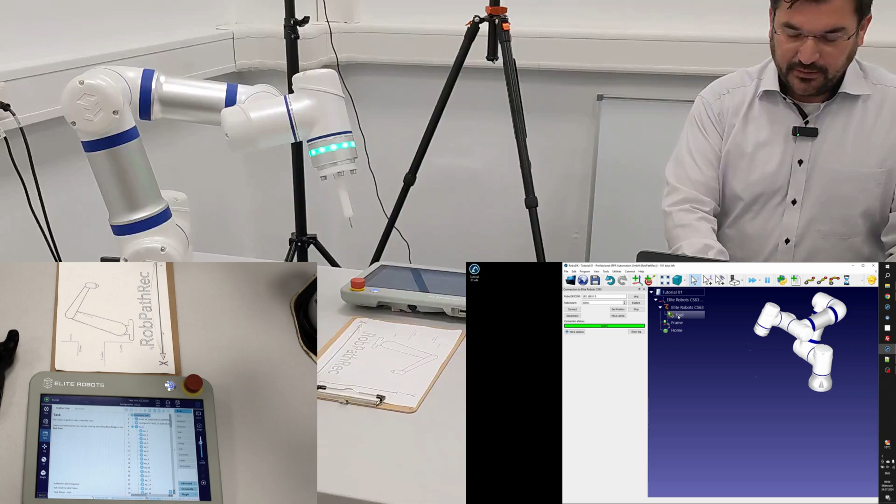Okay, so let's start with the first recording. We prepared everything, so we have a RoboDK station with a valid robot, a defined, calibrated, measured tool and frame. We have the home position.

I just start the VR application, Steam VR, and switch on the tracker. You can see from the status LED that the connection is built up, and you can check this on the screen as well. Okay, that seems to be fine right now.

If some of the components are missing, if you don't have any RoboDK file open, if you're missing one of the must-have components, robot, tool, frame, or the VR connection is not built up or active, then you'll get a failure message during the starting procedure of the Easy Automator app. But right now we have everything right, so we will just start the application.

And once it's open, I just hit start recording. So everything's fine. The pen, we will use the pen as a manual tool. Seems to be everything fine. Tool and frame, it's okay.

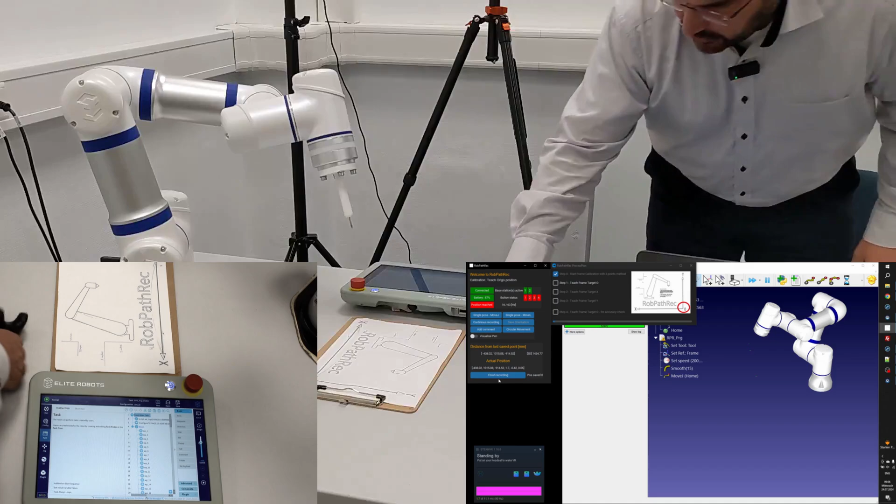And then start recording. So I just have to follow the instructions on the screen. That means just hitting 0, X, Y. As you can see, I already have the robot on the screen moving and following my hand.

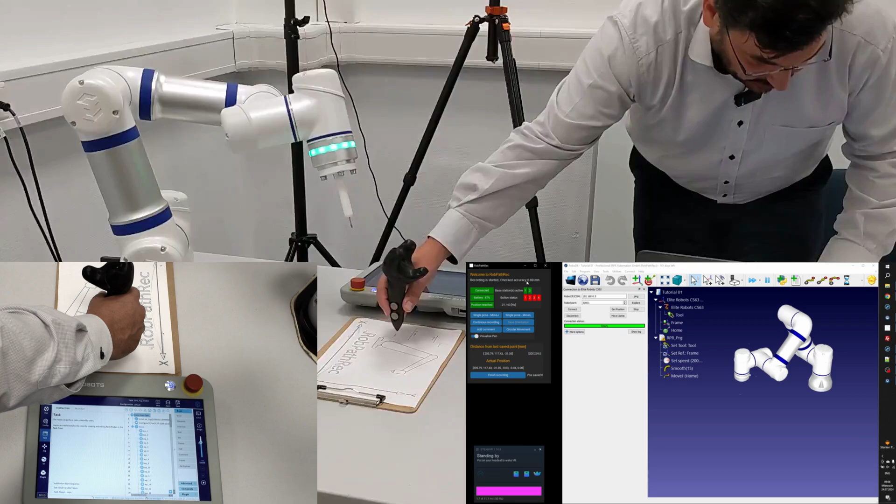I just have to come back to the 0 point to check out the accuracy. So we are below 1 millimeter, 0.89 millimeters. This is fair enough.

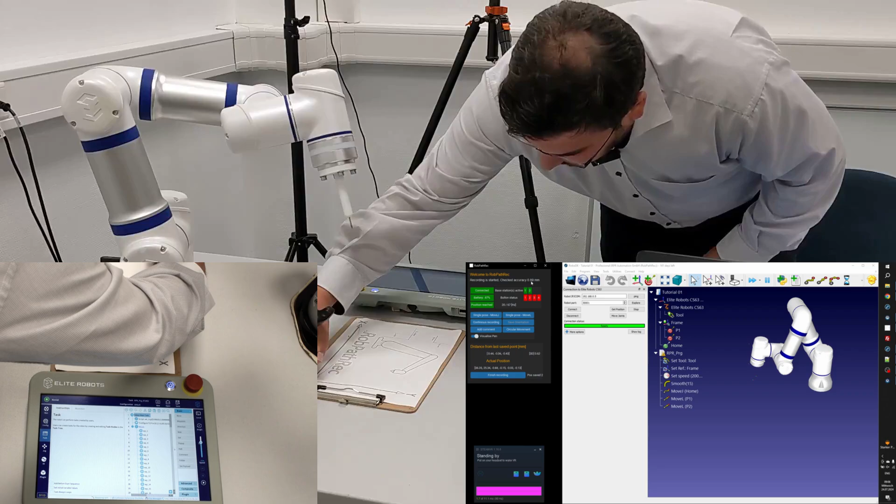First, I will just record a starting point, let me say here. Then I'm coming to the origin start point. With one point, I recorded the start point, and I'm recording the end point with one additional point.

Okay, then I come back to here, not moving directly over the surface of my workpiece. Then I'm coming back to the origin and recording the second axis. I'm coming back to here again.

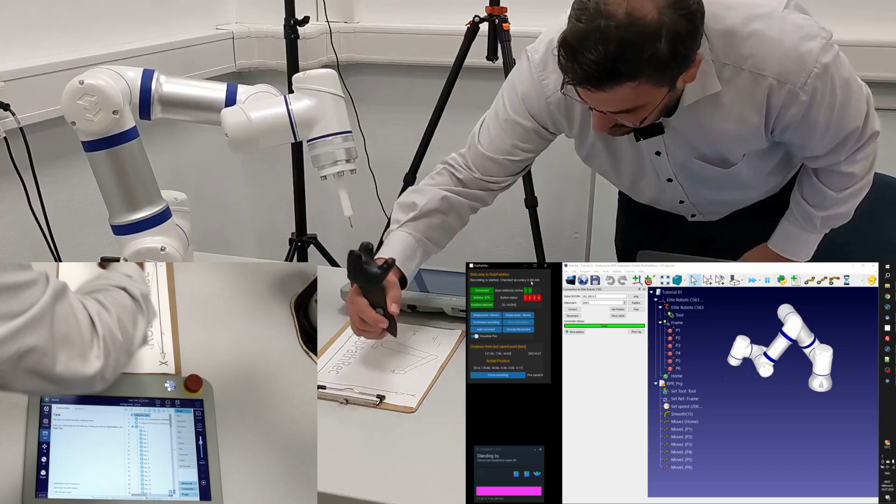And now I will record this part with a continuous recording. You will see that we will be able to record even the speed, depending on the change of the speed of my hand movements. We will record new speed values as well.

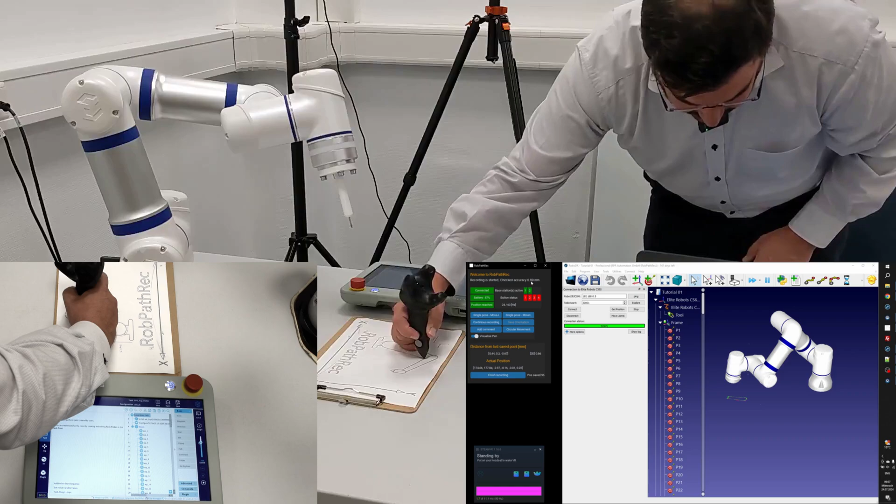Here I'm moving slowly, then quick again. Okay, I just released the button, so the continuous recording is not running at the moment. And I'm just coming back to this position, recording one additional point. So this should be fair enough.

The recording does not run anymore.

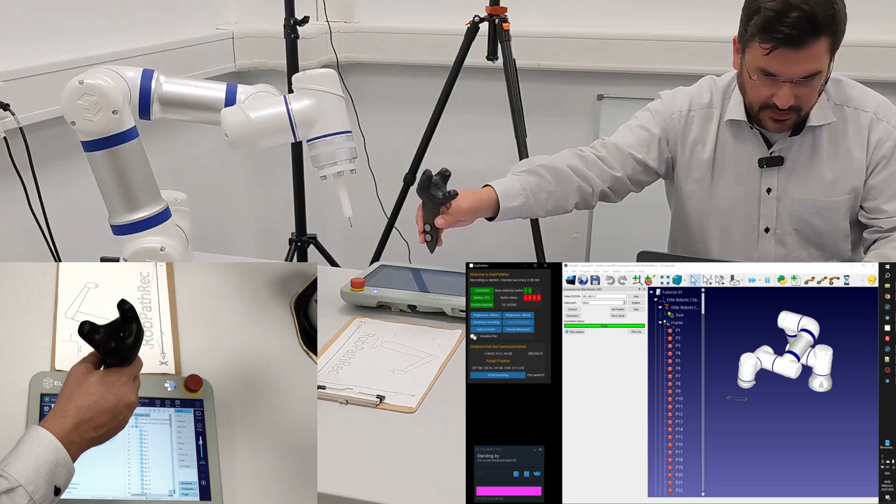I just wanted to visualize the pen, which you can do. You can see on the screen, if the robot can't reach the pen anymore, you still see the pen, how it is moving around in my hands. And once we are coming back to a region where the robot can reach this again, then it's ready to go.

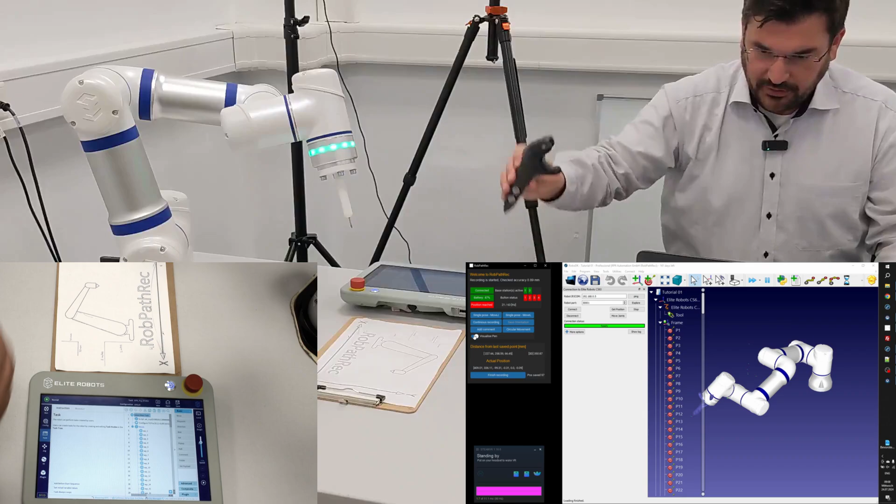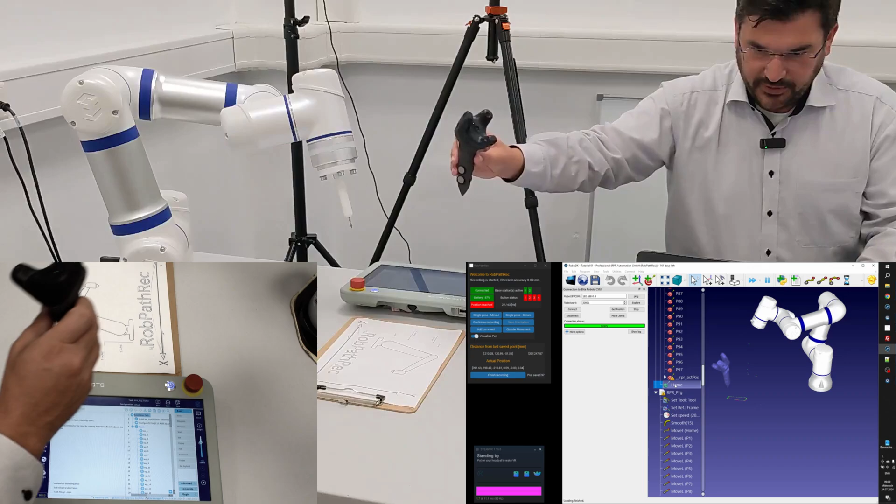If you have this problem that the robot is choosing a different kind of configuration than you want to have, then you can always double hit the home position. I try to reproduce somehow. Okay, maybe right now this will... no, this is too good. Anyhow, if you hit the home position, this will come back to the home position again, and then you are ready to go again. Okay?

So, okay, so the recording is finished. I'm just checking out with double-clicking the program if we can reach all of the points. It seems to be so.

If you want to change the speed of the simulation, you can do this here, and then really you will be able to see that this is running very fast right now, and you can speed this up. Additionally, with the plus minus signs, you can increase the size of the coordinate systems representing the tools here, and the frame, of course.

We have everything, so it seems to be there. The next thing I would like to do right now is go to the first point, P1 here, with the robot. Bam. And I am just hitting move joints.

Before I do this, I reduce the speed, and for sure I have to switch to remote, and if I hit move joints, then you can see that the robot is very slowly moving. Why am I doing this so smooth and so slow? Actually, this is the first time after creating this program that I'm moving the robot, so I'm quite confident that we have done everything correct and right, but still I want to check out with a slow movement that I don't crash anything, I don't hurt anybody, and that this is safe to operate.

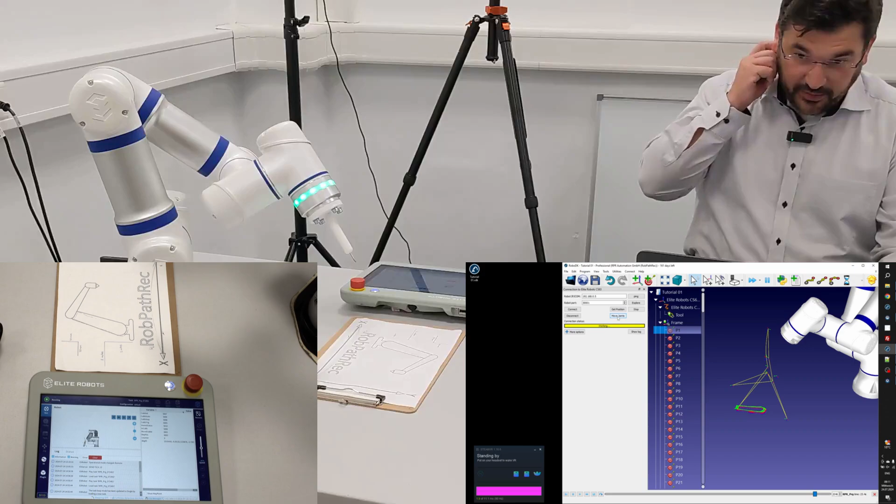I will raise back the speed so we can move on. I will check out this origin position and this position of the x-axis, if we can reach it and if everything's fine. So this will be one. Okay, then move joints. Still very slow. I'm just speeding it up.

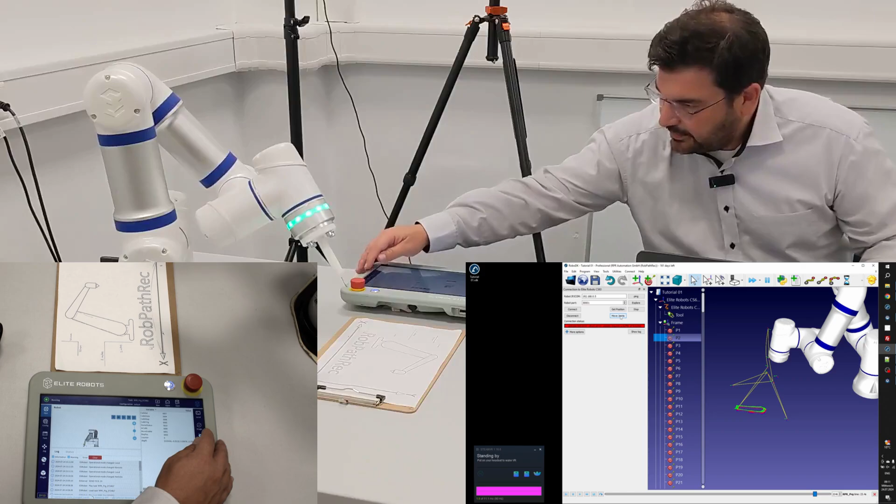So with the on the teach panel, please don't get irritated, I'm just getting this connection status unexpected error. I had some problems with my RoboDK installation during development. Maybe I just destroyed something or overwritten some values, but this does not influence our procedure at the moment. You can see we have approximately an overall tolerance, I would say up to 3 millimeters with this system.

This is a summary of the frame and tool definitions, which we have done earlier, the actual position, the actual performance of the optical system, and for sure the manual movements as I was recording all the points. I'm just coming back to the first position.

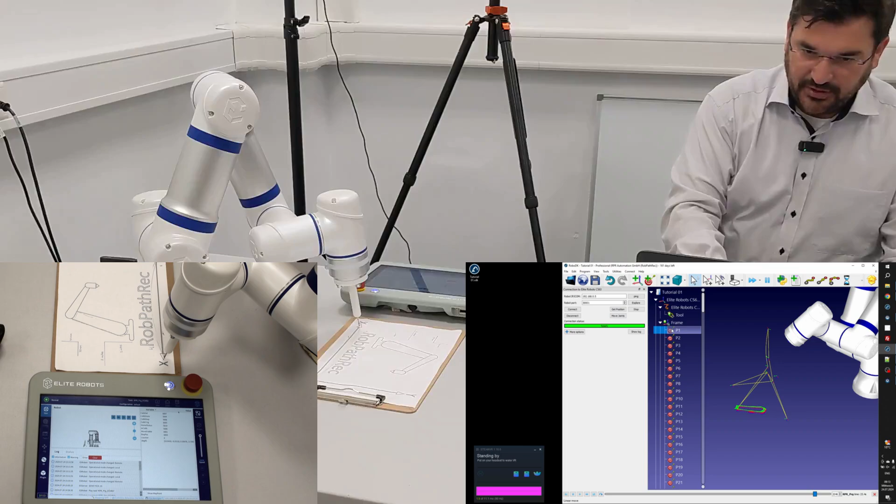I would do so if I would not be in remote mode. I'm just coming to the third position as well, just to check if it's good enough. Yes, this should be good enough for our purposes. So I'm just coming to the first position, or I could even move to the home position, here, the move joints.

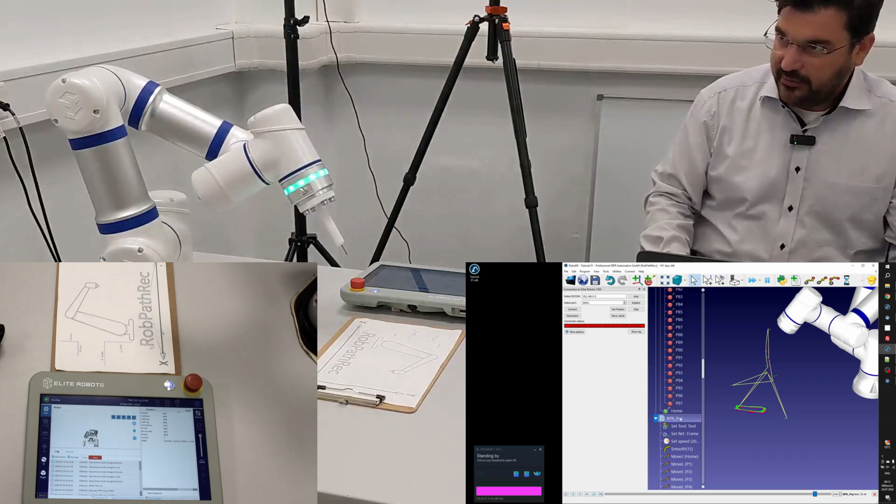I just renamed the program. I will not apply any kind of offset. There are a couple of ways how you can do the offsetting, I will show this later on. I just renamed this program right now as the date by today, 01.

Right click and just check out if the right post processor is selected. In my particular case, this is Elite CS Task. This is the post processor which I prefer, depending always on your robot what you are using. Then just simply hit generate robot program, right click and generate robot program. This will be created.

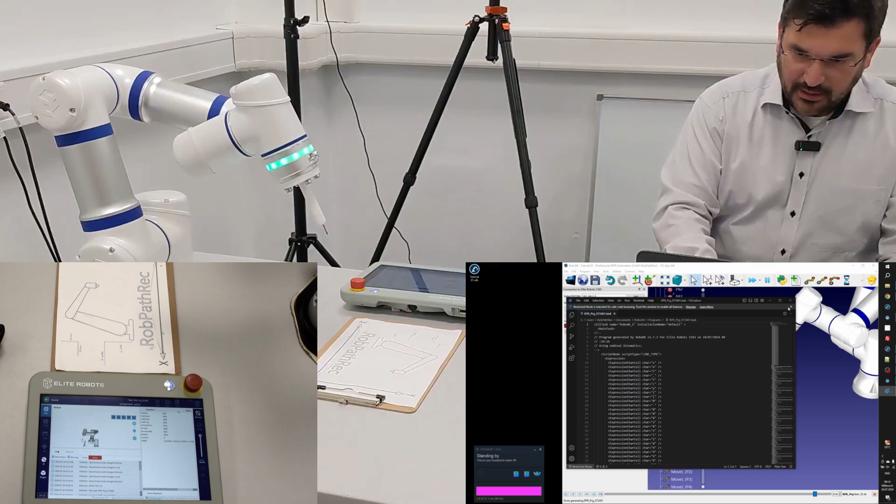Okay, I just made one failure at the moment, I think. Documents, RoboDK, programs. I just clean up all these because I created one program, and I just generate robot program again, and then you will see that this fresh new file is created here inside. So you can check all the lines in the program if you want.

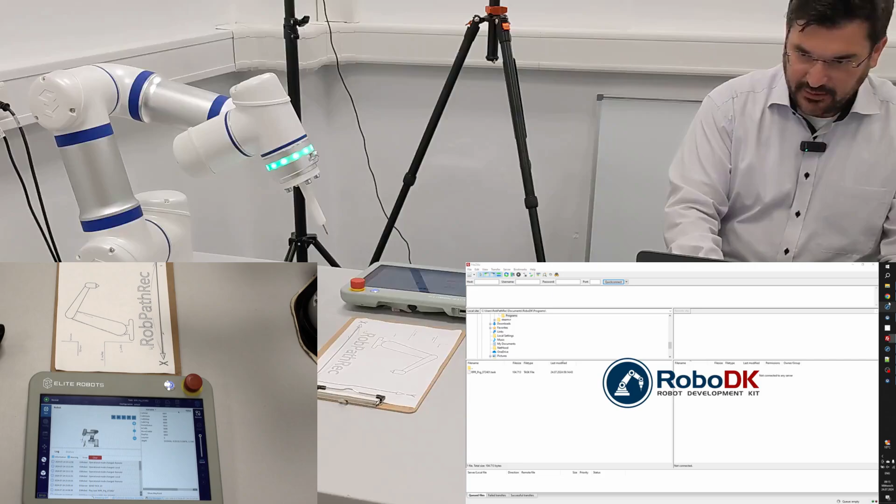And I'm just opening up FileZilla. You can do this directly from RoboDK as well. Sorry, this was not a good idea. If you hit the Explore button, I already configured my FTP connection to this robot. Therefore, all of the previous programs I will just simply delete. For the FTP connection, please contact or look in the manual of your robot manufacturer.

So I am in the right folder. On the right side, I'm on the robot, this is the robot controller. This is my PC where the RoboDK programs are stored. So I just double click it, and this will be automatically copied to the robot controller.

And if you are coming to the local mode and I'm coming to open task, you will see RPR_PRG, so exactly this which we just created. Excellent, seems to be very fine. And if you are coming to the task menu, then you can see all of the waypoints. At the very beginning, you can see this with the 200 millimeters per second, and here you can see the reduced one.

Please don't get irritated, we have a quite big value for the smooth value. The smooth value is defining a kind of rounding between the points, which is somehow a little bit senseless because we are creating one point at each millimeter with this setup, and we want to make a smoothing of 15 millimeters between the points. The robot movement will be very smooth, but we lose some accuracy. Nevertheless, just test this out.

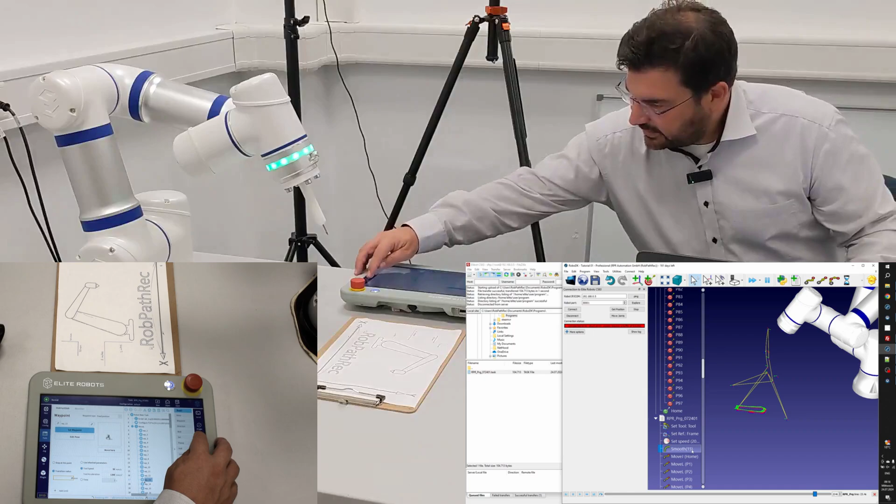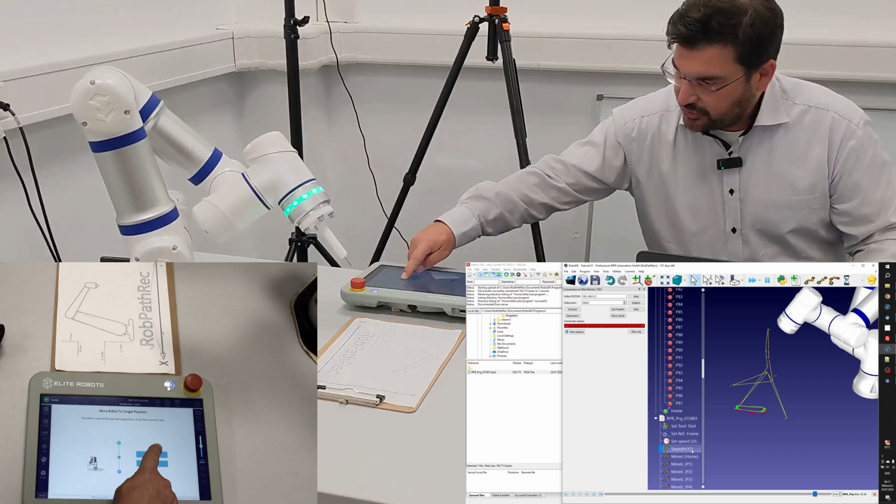I just reduce the speed. The first position should be navigated there manually, I guess, because of safety reasons, so we can see that we don't crash anything. And once the first point was reached, then we can switch to automatic mode, and the robot will move around by itself. And you can see we even have a small offset on the Z-axis.

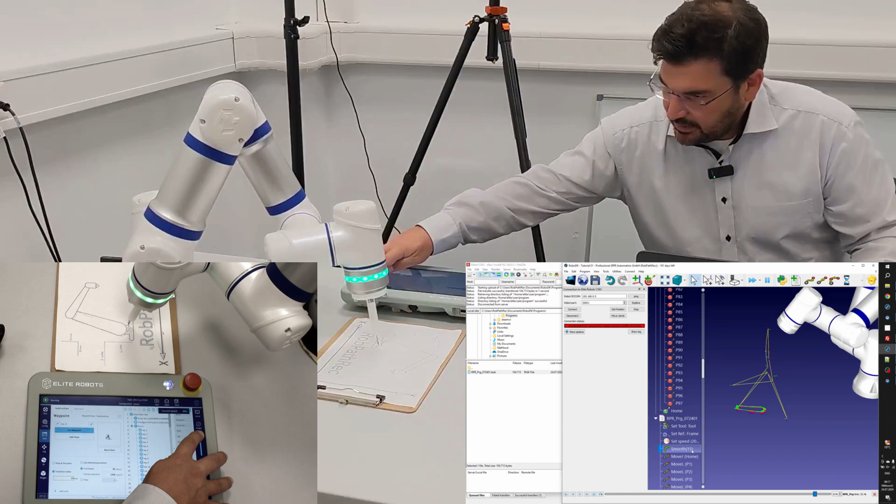Which is not so bad at the moment. And you will see as well that even the speed of the recording, so I don't touch anything, even the speed of the recording will be automatically transferred to the robot. How to make it with the offsetting? So just for your reference, I will show you, I will change the smooth value to 1 so that you can see the difference.

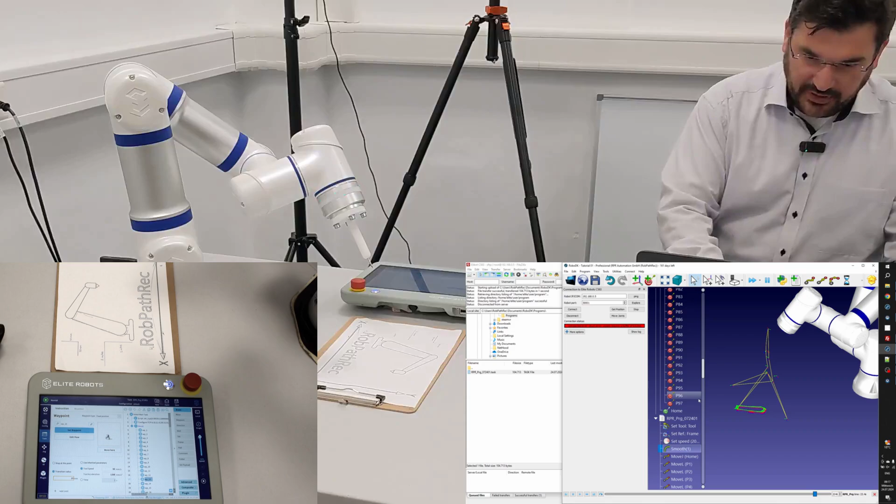I just rename it to 02 in the end, and I just generate again the robot program, which was done with just some mouse clicks. I can close this, refresh. The second program is here, double click, and we just copy this to the robot controller.

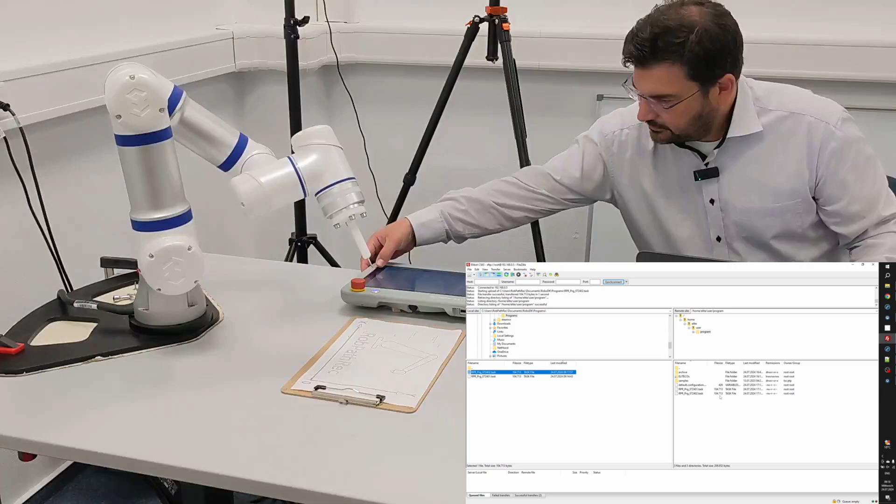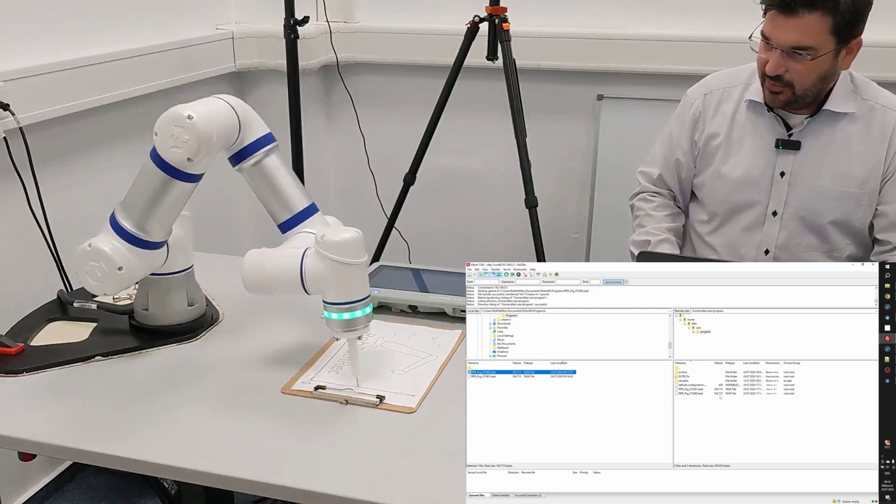I'm just coming back to the open task, and here you can see that even the freshly copied new file is already selected. So I just open it. And you will see the difference. So at this point, nothing, because we just recorded the start and the end points. But with the other points, you will see that the robot is just all the time accelerating and stopping between the points.

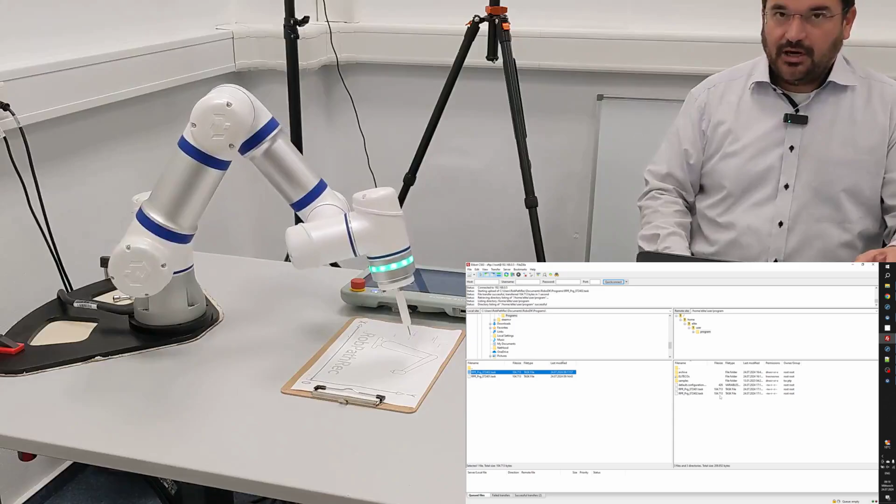This is for some processes not really useful, and therefore we can compensate this with the smoothness value. But there are a couple of ways how we can fix this, and I will show you. However, I think in not even 15 minutes, we recorded a path, we checked the path if it's approximately right, and we transferred it to the robot, and we just tested this out. So this is quite an easy and fast process.

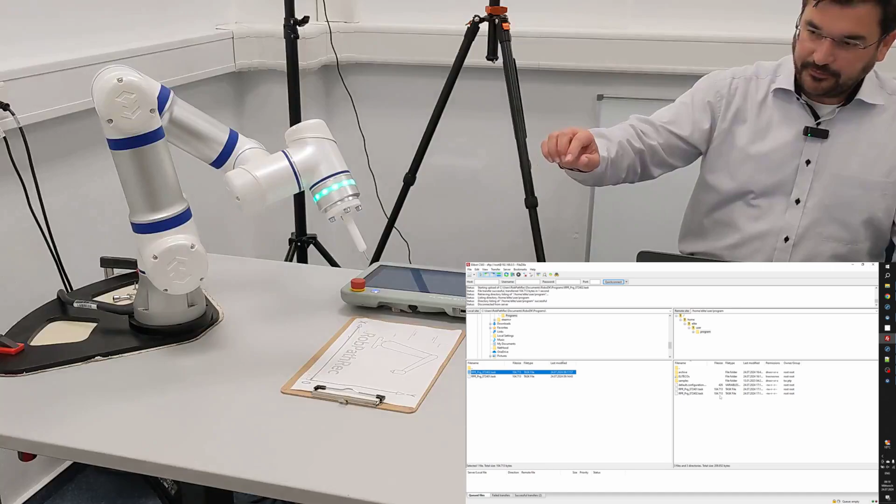So we will move to the next section where I will show you how you can do the same recording, not in front of the robot, but for example in front of me, because this is then easier to do.